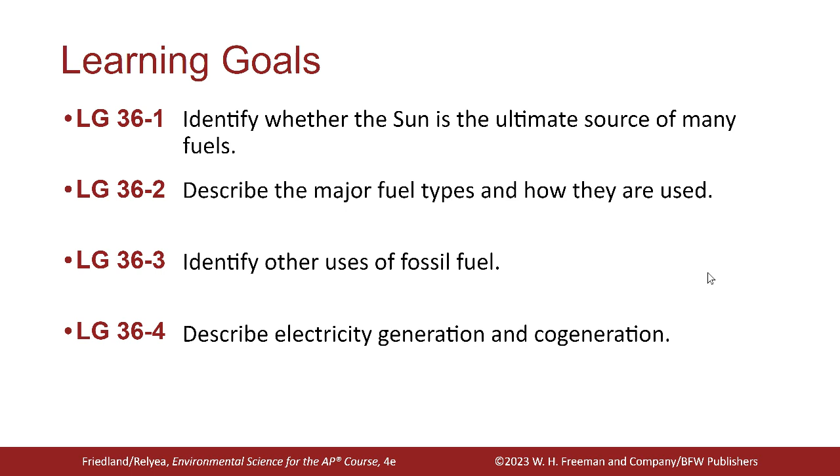So your first standard: identify whether the sun is the ultimate source of many fuels. The sun is the ultimate source of many energy sources on Earth, both renewable and non-renewable.

Biofuels are biomass that's processed and refined into liquid fuels like biodiesel and ethanol. Biofuels and biomass make up 40% of renewable energy and 5% of energy consumed in the United States today.

Okay, how are those things related? How is the sun related to biofuels? Take a guess. Because plants use the sun to grow. Yes, plants use the sun to grow, but how does that get into our energy resources?

Because it's like dead plants. It's also dead animals that eat the plants. Yeah, good. So the sun grows the plants, animals eat the plants, plants and animals die, they decompose for millions of years, turning into fossil fuels, right?

Okay, another biofuel we could talk about is oils, like vegetable oil. If you convert your car into a green car, before electric cars were really a thing, you would take the used grease and stuff like that from restaurants where they fry their French fries. That's animal oil, but you could also use plant oil, like what you cook with, to run these cars.

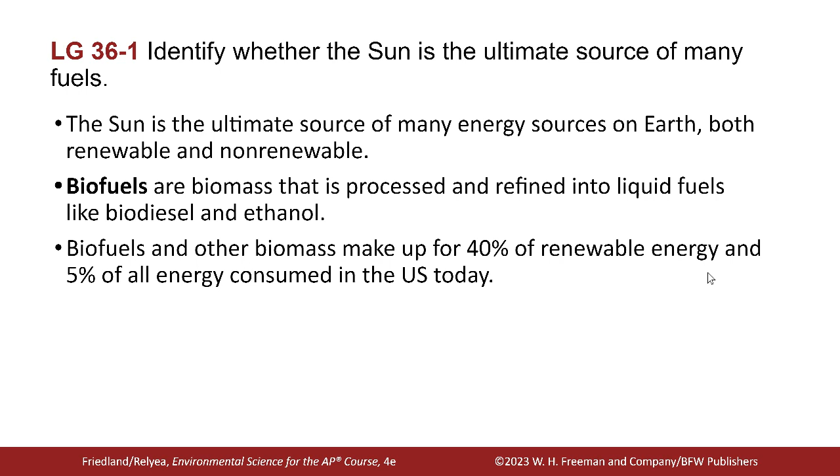So if you burn biodiesel, it's got a little bit of that in it. It's kind of cheap, and it smells like French fries running down the road.

So the sun is the ultimate energy source. You guys probably know that, but just to reiterate, okay.

Then the sun goes into solar, obviously. We also use, or some places use, manure — the methane that comes from manure — to power their farms and things like that, because it's a clean burning fuel and they're already naturally getting it.

The one you might not think about is hydroelectric. You think, oh, that's water, but how do rivers keep flowing? We've got to have some evaporation and bring it back to the top, right? So the water cycle is caused by the sun, because if the earth was cold, there would be no evaporation, which means there would be no precipitation at the top to bring it back down. Does that make sense? Okay, so think about that.

Good. Another one we don't really talk about a whole bunch is tidal energy. When I was here, there was a big push for us to use energy from the ocean. Essentially what's happening out there is there are buoys absorbing the energy from the tide, pushing it in, and that's converting it into energy we can use for houses and things like that, which is pretty interesting. It's just not cheap enough to do all the time yet.

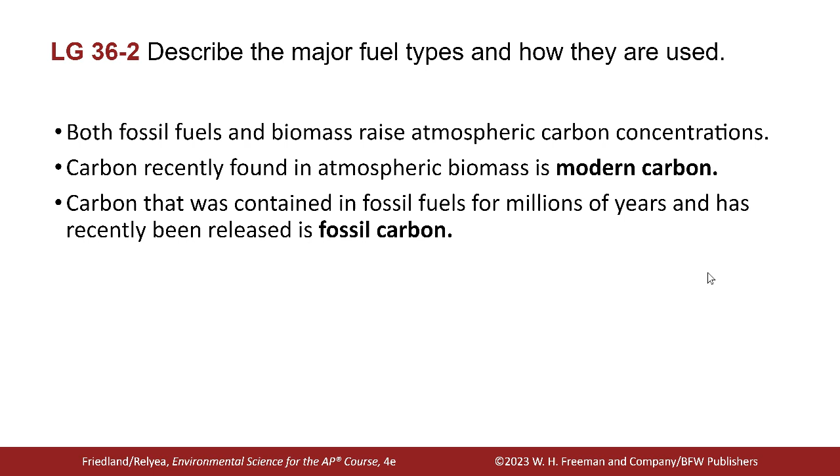Janae? For biofuel, it has less of an impact, I think, on the environment whenever you harvest it versus extracting fossil fuels. And also biofuel, I think because it's more expensive to harvest, is used less than fossil fuels are. Anybody else have anything?

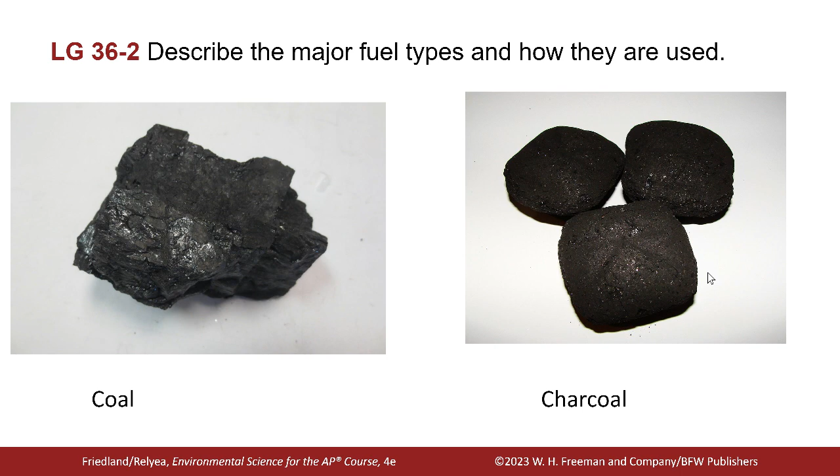Anybody know what charcoal is? Isn't it just really compacted wood? Yeah, so most of the time it's wood that they've pre-burned for you, and then they pack it into those briquettes. If you've ever seen a smoker, they usually have charcoal, like branches and stuff that they'll use.

So the question from earlier: is it better to use a modern carbon versus a fossil carbon? The general idea is that it's better to use modern carbon because that has at some point taken CO2 out of the atmosphere within your lifetime. Dinosaurs and things like that have been in the ground for millions of years. We're taking carbon that's in the ground from a long time ago and putting it back into the atmosphere. Whereas if you're taking down a tree, that carbon has only been around since your lifetime, so you're just releasing carbon that was there not that long ago.

Does that make sense? A little bit, maybe. Yeah, so you're releasing a newer, lesser amount. If it's older, it's going to put out a lot more. So carbon neutral is what we're trying to get to, releasing the same amount of carbon that we're absorbing, whereas with fossil fuels you're not going to do that because that's millions of years old. Does that make sense? Yes.

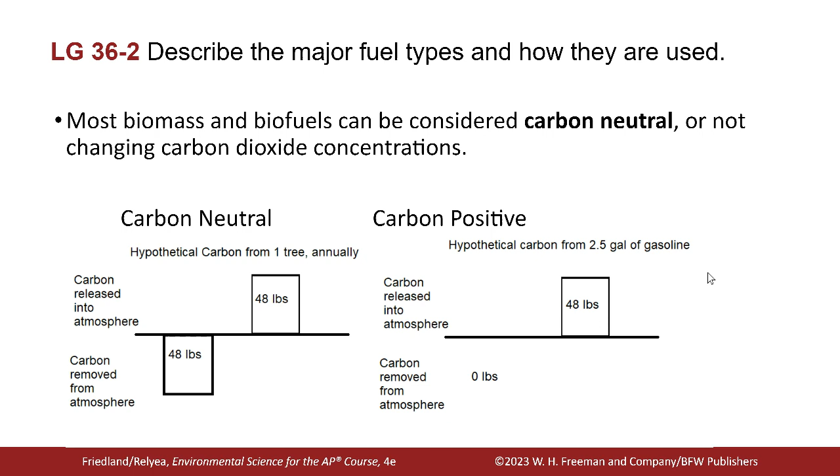Another example of modern carbon is they're using plankton in the sea and turning it into biofuels. Plankton and algae are really productive at taking carbon dioxide out of the atmosphere through photosynthesis, and they're really fast at repopulating. You guys saw how quickly we got algae in the fish tanks, right? Same concept. So we're taking carbon out, and if we use it as fuel, it's really not adding any more carbon back to the environment. It's just using what was there like a week ago. Yeah, renewable carbon essentially.

Common fuel types include wood, coal/peat, natural gas, crude oil, and tar sands.

What is wood peat? What is peat? You're gonna find out. Yeah, it's pretty much like a prequel to coal.

Wood provides heating and cooking to 2 to 3 billion people in the world. Imagine if you had to use wood to heat your house, had to, not choose to, and to cook your food. It would take a lot longer, right?

3 million homes in the United States still use wood as a primary heating fuel. That's not that many compared to how big the United States is, and it's usually in more rural areas.

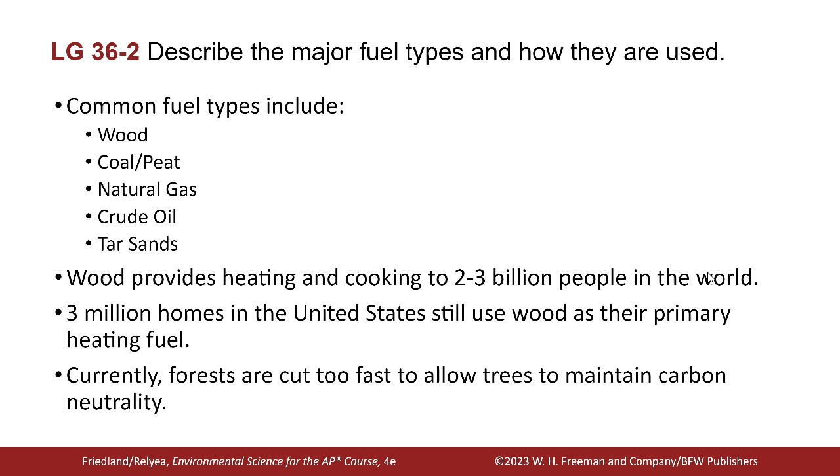Currently forests are being cut too fast to allow trees to maintain carbon neutrality. If they were selectively cut, we probably would have more of a carbon neutral environment, but our population is growing, especially in those developing countries where their population curve is still going up, it's not going down like ours is. You're going to have more need for more homes, which means you're going to need to fuel them and heat them and cook for them.

Coal is a solid fuel that comes from the remains of trees, ferns, and plant materials preserved 280 million to 360 million years ago. It's typically used for electricity generation in industrial processes and can be found in many forms.

There are different types of coal. We have peat, which is partially decomposed organic matter like mosses. We have lignite, which is soft sedimentary rock with traces of plant structures. It's 67% carbon, also called brown coal.

Bituminous coal is black or dark brown coal with bitumen in it, also known as asphalt. Do you guys see any asphalt around here? Most of your streets are asphalt. I don't think that's concrete, but okay.

Anthracite is hard coal, which generates 90% carbon. It's the highest energy per volume. Yesterday we talked about that's why we use gasoline in cars, because it's the highest energy for the amount of space that it takes. It's actually really efficient.

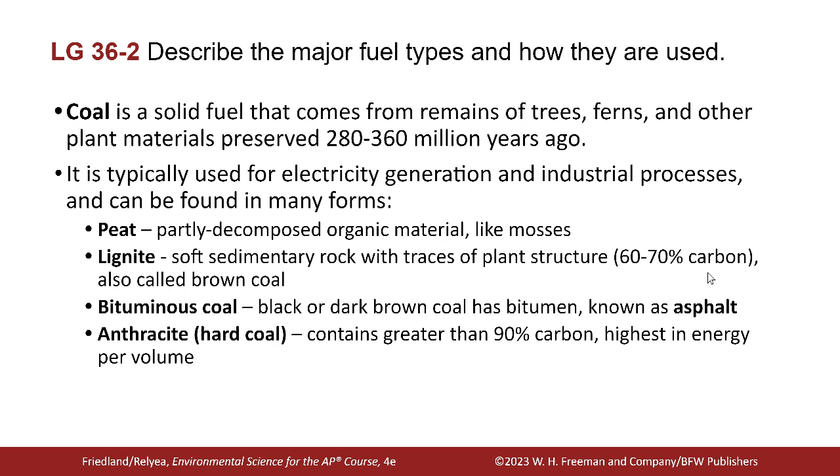I'm not going to go over this too in depth, but this is kind of where it gets from peat to the hard coal. Peat is about 50 meters thick, on the top level, so it's probably like your H or your F horizon of your soil, so it's going to be below that. Your lignite gets even further from there, and with heat and pressure it starts to combine, just like sedimentary rocks, but it's coal.

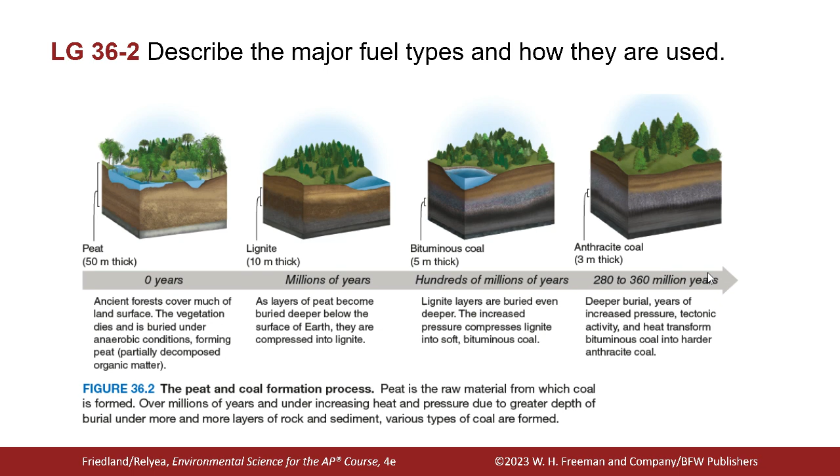The next type of fuel is called natural gas. You're probably familiar with this. It's considered a cleaner source of combustion due to its smaller amount of particles, sulfur dioxide and carbon dioxide, compared to coal or oil. Most of this gas is methane, CH4, and the remainder is propane and butane.

It can be compressed and liquefied for transport. Natural gas comprises 24% of total energy consumption globally.

This is not the gas that you put in your car. This is the gas that you might have a big tank on the outside of your house where it gets stored, or if you have a gas furnace or gas stove, it's usually powered by this type of gas.

It's usually cleaner burning, which is good, so you don't get a headache when you're cooking. You use it on a propane grill — it's using natural gas, you can buy it at the store. If you ever go camping, you probably have a butane stove, and you can buy that at Academy Sports.

There's a TikTok going around where this couple is using only sustainable materials and living off the grid. They use a compost pile and put a big tarp over it, which catches the methane from the decomposition, and they funnel it to cook with. Pretty cool.

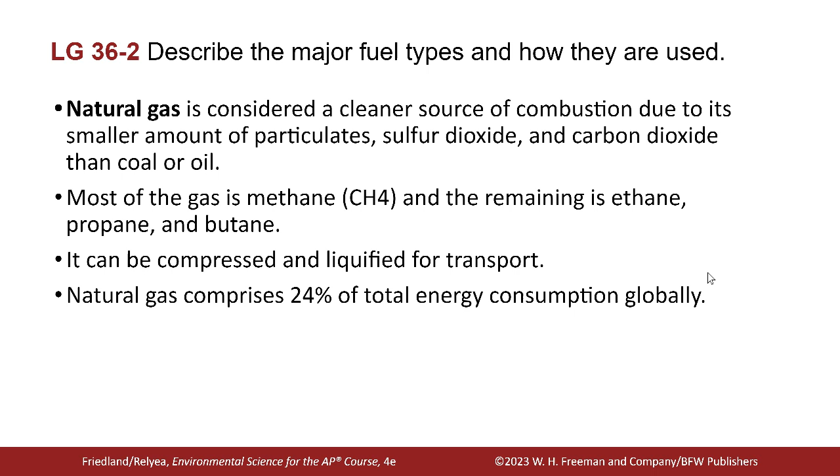But for free. Well, there we go. I see it from right here.

Crude oil is a mixture of hydrocarbons such as oil, gasoline, and kerosene, as well as water and sulfur, that exists in a liquid state underground and when brought to the surface.

Oils used in vehicles can be refined into a variety of compounds through a process of boiling, producing things like tar, asphalt, gasoline, diesel, and kerosene. So when you hear about barrels of oil from other countries, or crude oil, that's what you're putting in your cars, that's what they're making roads out of, and that's what they're using to put the shingles on your house. All those things are oil.

As 16, 17, 18-year-olds, you should all be pretty familiar with oil. It's what you use in your car to lubricate your engine so that it doesn't seize. Or you should be doing that — please get your oil changed.

Questions so far? This is just an information dump. There's not a lot of practical thinking.

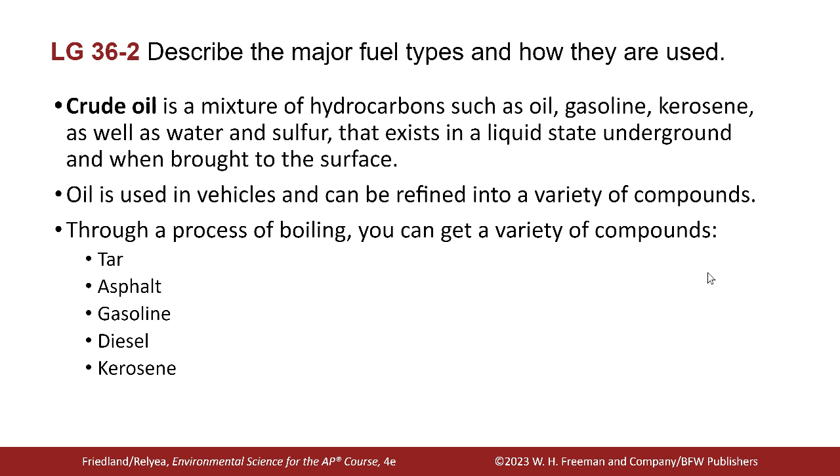This slide shows the different boiling points of these types of fuels. They take this crude oil barrel and heat it up, and the lighter stuff has a lower boiling point, so it goes up further on the distiller. Your Bic lighters, butane, propane, all go to the top of this column and get captured there. Your heavier things, like residual oil or heavy gas oil, stay lower because they have a higher boiling point, so they don't float as high. They siphon it off at its different levels, which is kind of neat.

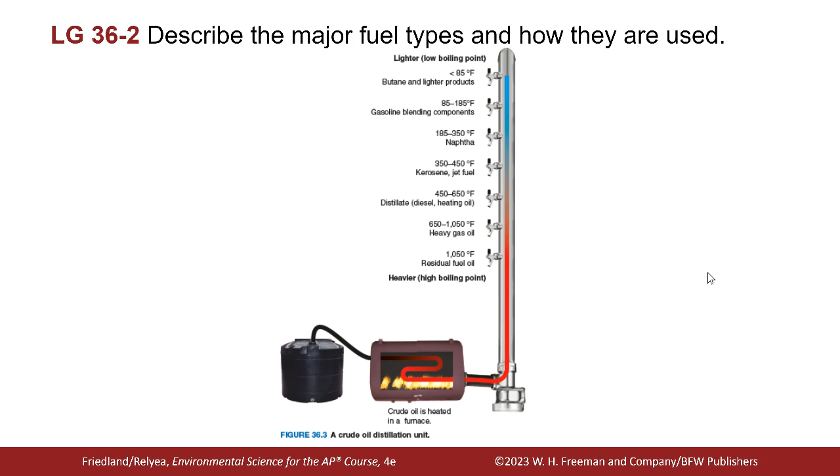A while back you had an FRQ that asked about tar sands. We haven't really gone over it, so I was pretty generous on that. Tar sands are slow-flowing, viscous deposits of bitumen and asphalt mixed with sand, water, and clay. Due to the oil near the surface, it no longer flows and it's mixed with sand and soil. If it's extracted, it can have a lot of negative impact on the environment. I don't really know why you would choose to use this, because it seems like a pain to separate out, clean, and refine, and you're still doing damage to the environment because you have to extract it, then add a lot of CO2 transporting and refining it. So I don't think it's worth the time.

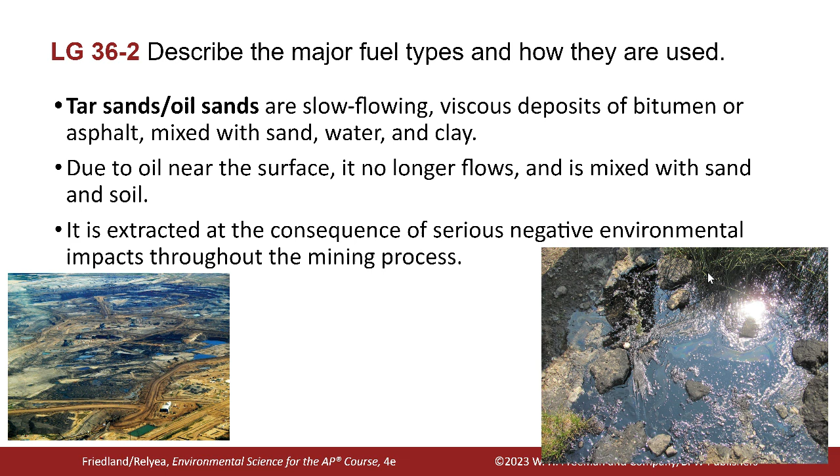It's not one that we use probably a lot today. All right.

So we're on our third standard, and that is identify other uses of fossil fuels. Fossil fuels are highly specialized to be used in motor vehicles and electricity. All conversions of energy lose efficiency, but there are methods to capture as much as possible. The modern design electric water heaters are 99% efficient. When you're talking about energy, it's impossible to have 100% efficiency, because as you convert energy from one thing to another, you lose it in the process of conversion.

But electric water heaters are the closest you're going to get. The reason is your electricity comes into the electric heater supply, and instead of being lost to the environment, it's lost to the water that's in there. The water absorbs the heat, so you're losing the least amount of energy possible in an electric water heater, which is kind of interesting.

A gas water heater is only about 60% efficient. You can probably see why, because it's heating this up but you're still losing energy out this way, whereas the electric one is completely submerged in the water. So the electric is losing heat, but it's losing it to the water, and that's the whole goal of the water heater, right? The propane is losing heat too, so it loses some into the water, but some just into the environment.

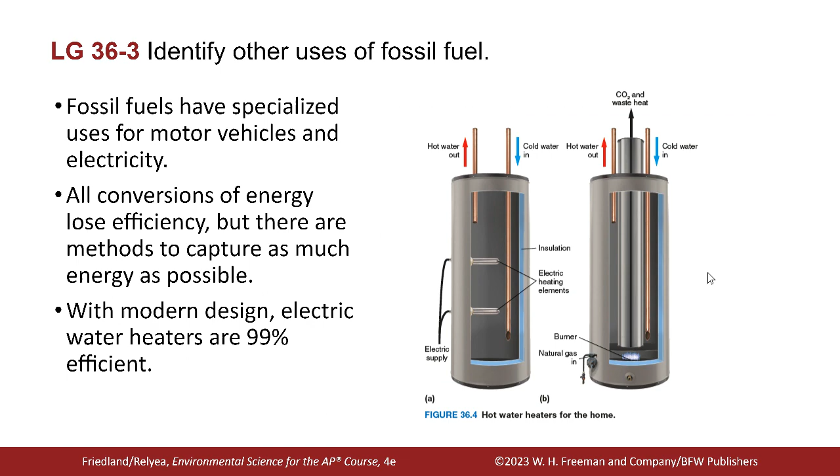Electricity is gathered via conversion from a fuel or a resource. A lot of times it works like this: you have a fuel like gas, and it heats up water, turning it to steam, which turns a turbine. As the turbine moves, it turns a generator, and this generator takes the steam heat and converts it into electricity. That's generation—it's making the energy. It's a long process.

But then we have another thing called cogeneration, because when we turn the turbine, do you think that's 100% efficient? No, you lose a lot of energy doing that, and a lot of energy just goes around the turbine. What they're able to do now is take the steam from that and put it through a transfer unit. They turn that steam or hot water and cool it back down. As they cool it down, energy releases, because when you have a lot of energy in a substance, it turns into a gas, and when it turns back into a liquid, you lose energy.

Chemistry people, yes? I was listening, yep, sure. I was looking at you.

An energy carrier, like a source of electricity, can move and deliver energy in a convenient, usable form for all users. Energy conversion right now is only about 36% efficient, and fossil fuels can release many pollutants in this process. So even though it's getting more efficient, we're still using fossil fuels, which is bad for our environment—we know about carbon and greenhouse gases and warming of the earth.

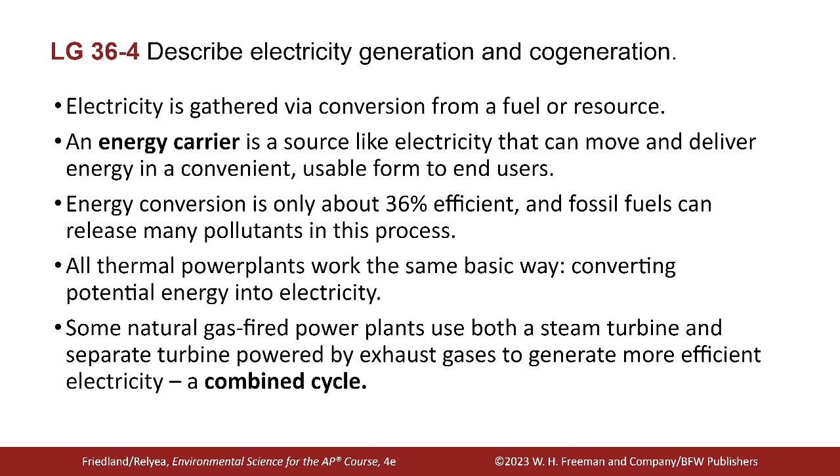All thermal power plants work on the same basic principle: they convert potential energy into electric energy. That's what we just looked at. Some natural gas-fired power plants use both a steam turbine and a separate turbine powered by exhaust gas to generate more efficient electricity—a combined cycle. This is the combined cycle right there; we'll go back to it in just a second.

Some good vocab words to know: the capacity of a power plant is the maximum electrical output it can handle, so how much electricity it can put out. The fraction of the time a plant operates in one year is known as capacity factor—that'll be a math term you might need, but not today.

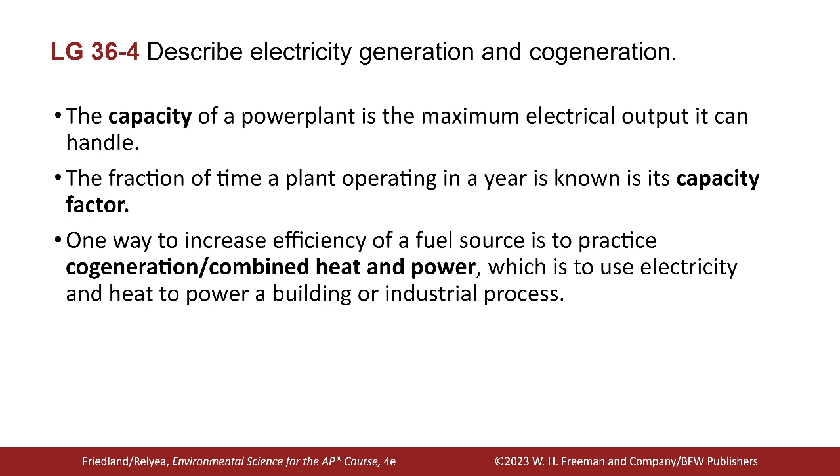One way to increase efficiency of a fuel source is to practice cogeneration and combined heat and power, which uses electricity and heat to power a building or an industrial process. So we have generation, where the turbine is turning the generator, which is turning it into electricity, and a cogenerator, where it's catching some of the inefficient loss and creating more electricity.

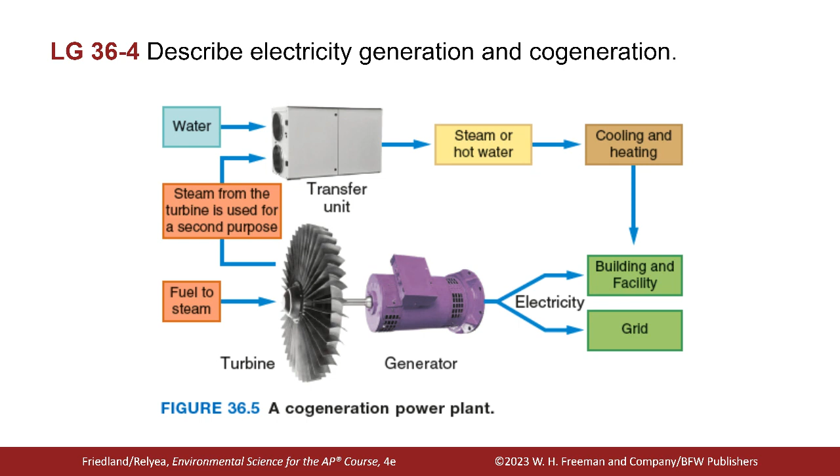Okay, all right, so that is it.